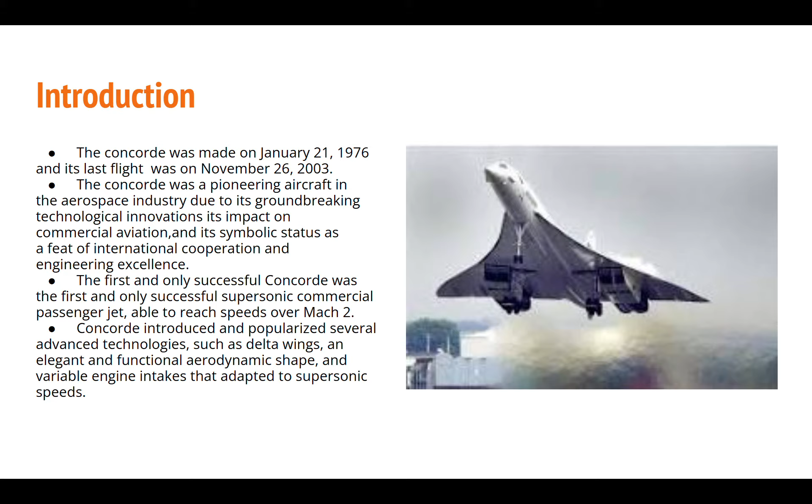The Concorde introduced and popularized several advanced technologies, such as delta wings—an elegant and functional aerodynamic shape—and variable engine intakes that adapt to supersonic speeds. It was the first supersonic commercial airplane, built by aircraft manufacturers in Great Britain and France, and it flew thousands of passengers across the Atlantic at twice the speed of sound for over 25 years.

In 1989, Air France signed a letter of agreement to donate a Concorde to the National Air and Space Museum upon the aircraft's retirement. In 2003, Air France honored this agreement, donating the Concorde F-BVFA to the museum upon completing its last flight. The aircraft had flown a total of 17,824 hours. 20 aircraft were produced, but only 14 went into service.

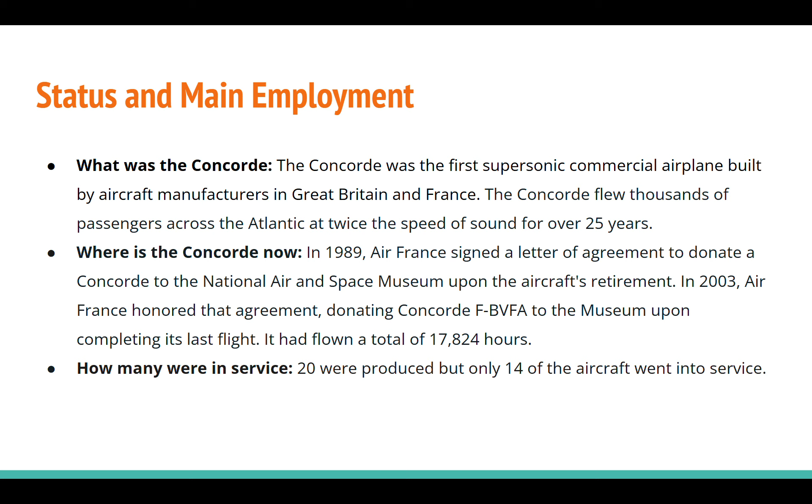The development of the Concorde started in the late 1950s with the Supersonic Transport Aircraft Committee. The British Aircraft Company tested its first flight with the BAC 221 for supersonic testing, and the first prototype flight of the Concorde took place with 2 tracker jets to calibrate airspeed and indication on March 2nd, 1968.

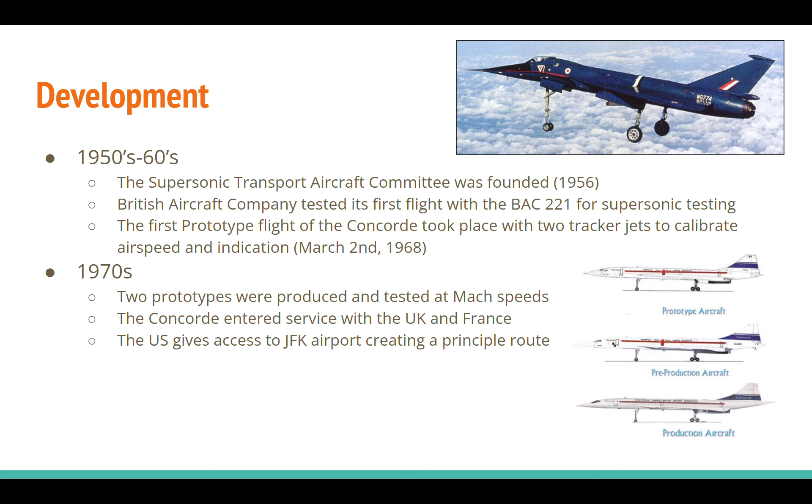In the 1970s, two Concorde prototypes were produced and tested at speeds of Mach 2, and eventually the Concorde entered service with only the UK and France having aircraft. Later on, the US gave access to JFK Airport, creating a principal route for the next 25 years.

In the 1990s to 2000s, the fastest flight recorded between New York and London was 2 hours and 53 minutes, one of the fastest times taken.

On July 25th, 2000, an Air France Concorde crashed after takeoff from a piece of debris, popping a rear tire, causing parts of the tire to pop the fuel tank and causing the engine to catch fire.

After the crash, both Air France and British Airways withdrew service of the Concorde to begin improvements of the aircraft. In late September, improvements were made with the wheels and fuel tanks. British Airways and Air France reapplied for airworthiness and continued the flights.

In late April of 2003, British Airways and Air France announced that at the end of the year the Concorde program would be retired. Now, the cost of the Concorde.

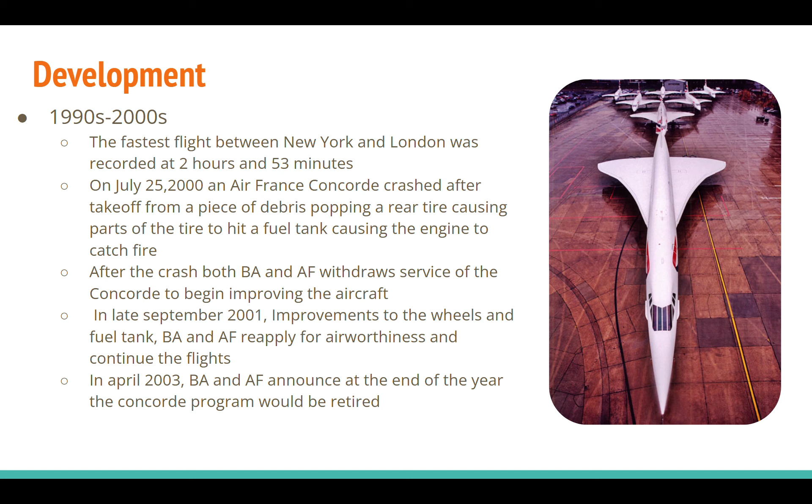One Concorde cost roughly $46 million, estimated at $350 million in today's price adjusted for inflation. The development cost roughly $1.14 billion to $2 billion, split between France and the UK. Of the 16 planes built, costing a total of $819 million, only $348 million was recovered through sales and returns.

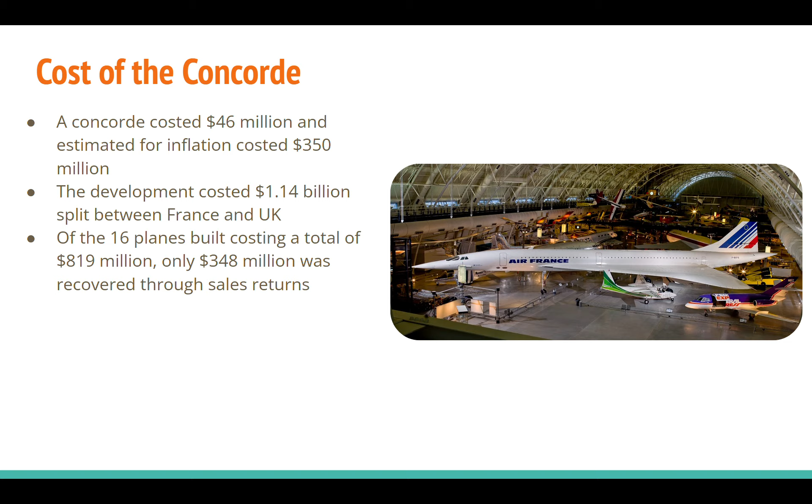Moving on to the dimensions and properties of the aircraft: the empty weight of the Concorde was 92,080 kilograms, while the max payload was 13,380 kilograms. The maximum takeoff weight with fuel and payload was 185,000 kilograms, and the max landing weight was 111,130 kilograms. Overall, the fuel weight was 95,680 kilograms.

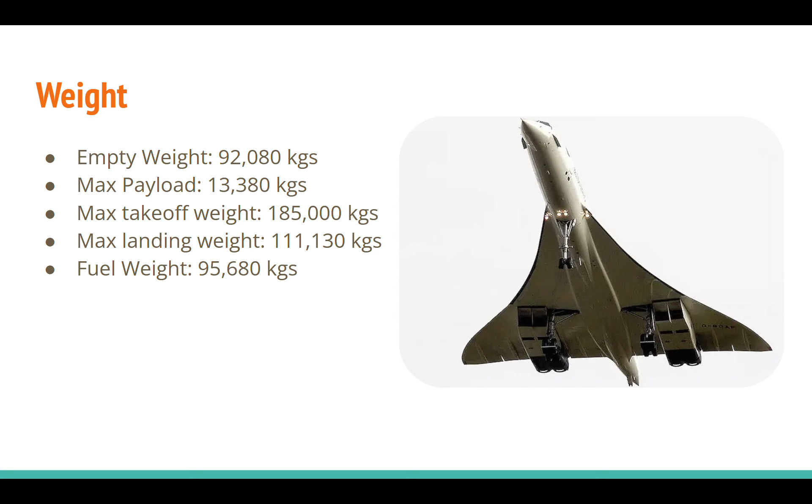Moving on to more dimensions, the overall length of the Concorde was 61.66 meters, and the height from the bottom of the wheel to the top of the fin was 12.2 meters. The fuselage had a width of only 2.9 meters, and the whole aircraft had a wingspan of 25.6 meters.

The length of the root chord was 27.66 meters, leading the Concorde to have a small aspect ratio of 1.85 and a total wing area of 358.25 square meters.

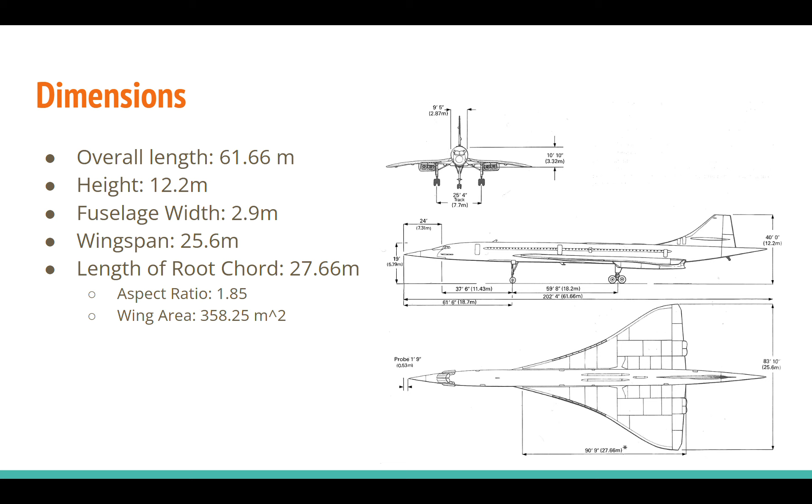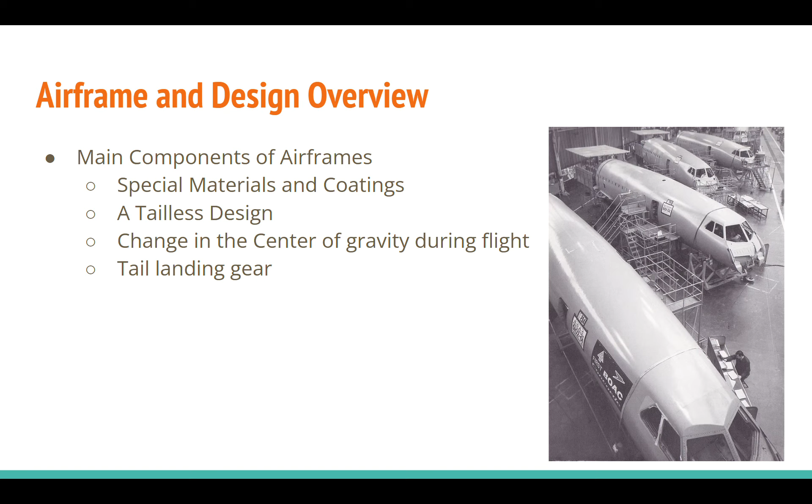From the airframe and design overview, the main components included special materials and coatings, a tailless design, changes in the center of gravity mid-flight, and tail landing gear.

For the special materials and coatings, it used a Hiduminium alloy—a high-strength alloy developed by Rolls-Royce—with main impurities including magnesium and copper. The temperature limit was 127 degrees Celsius, only allowing it to reach Mach 2.02 as a max speed.

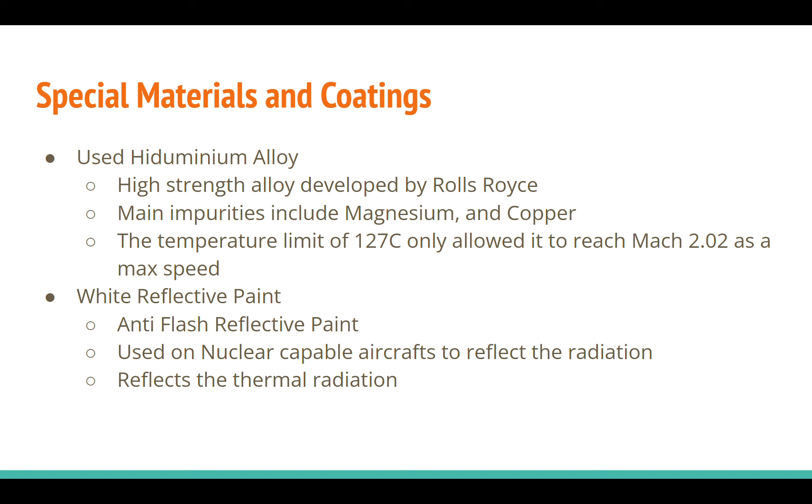There was also a white reflective paint with anti-flash properties, used on nuclear-capable aircraft to reflect radiation. It also reflects thermal radiation as well.

The Concorde had a tailless design, so there was no horizontal stabilizer, which reduced parasitic drag. Instead, they used elevons for much more stable flight.

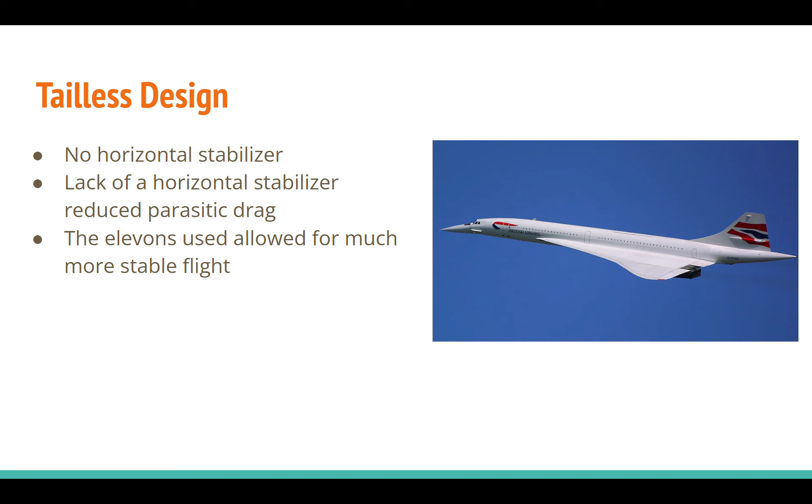Because of the critical Mach number being exceeded, the center of pressure would move backwards when the aircraft exceeded that speed. They had to combat this, because it would be very inefficient to try to adjust and trim the aircraft at those speeds. So, to combat this, they used fuel distribution tanks to move the center of pressure backwards, and as it moved backwards, the center of gravity also moved backwards.

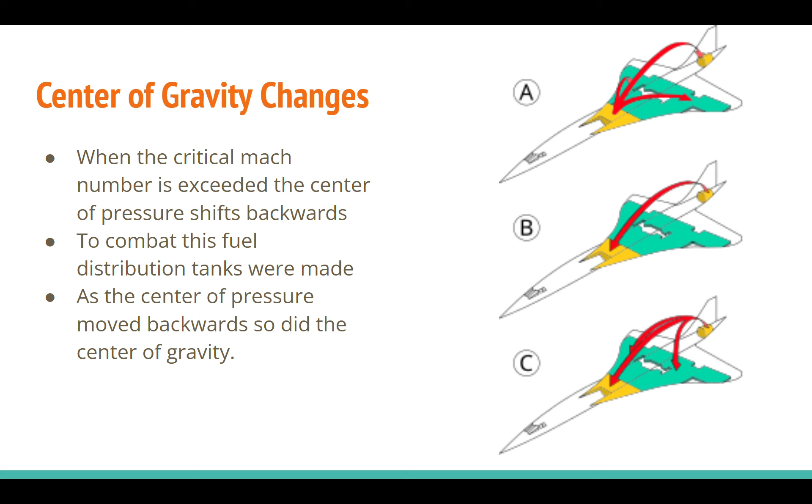In addition, they used tail wheels. The tail wheels were used to protect the Concorde during landing and takeoff, and also helped optimize the angle of attack for takeoff. In the event that the wheels touched on landing, they would compress before the engines touched the ground.

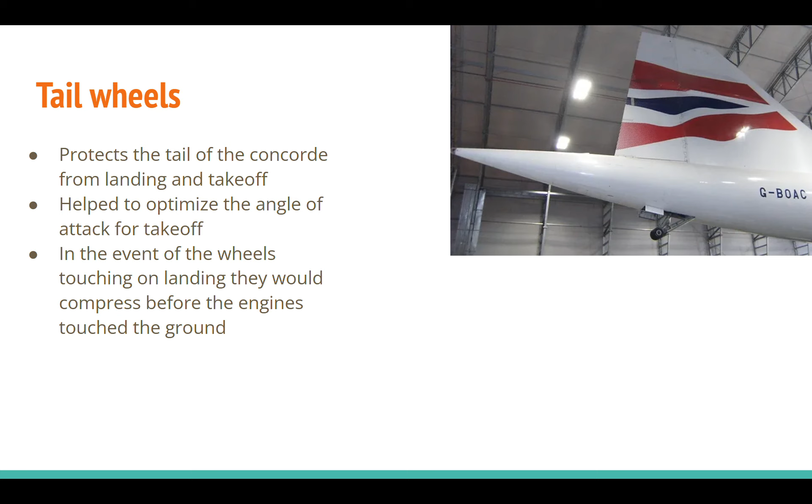The power plant had a variable intake system which allowed for compression of air at supersonic speeds. It used two ramps, one converging and one diverging, because it would be easier and make the engine much more efficient at those speeds. It was able to increase fuel efficiency at cruising altitude to Mach 2.2, beyond the capabilities of what the airframe could handle. This was also easier to accomplish through nonlinear controls, using a spill door and intake flaps to help.

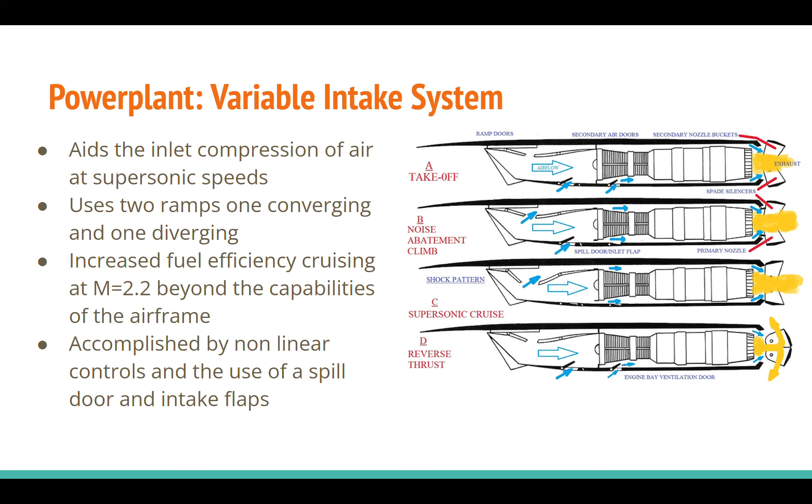For the power plant, it used a Rolls-Royce Snecma Olympus 593. The Concorde used four of these jet engines, a two-shaft turbojet with reheat, with a 7-stage high-pressure and low-pressure compressor. It had 140 kilonewtons of thrust, and 169.3 kilonewtons with the afterburner. Parts that received excessive heat were constructed out of titanium, and because of this, the life expectancy of the parts was considered to be 25,000 hours, with the exception of the compressor and turbine blades, which had a life of 10,000 hours.

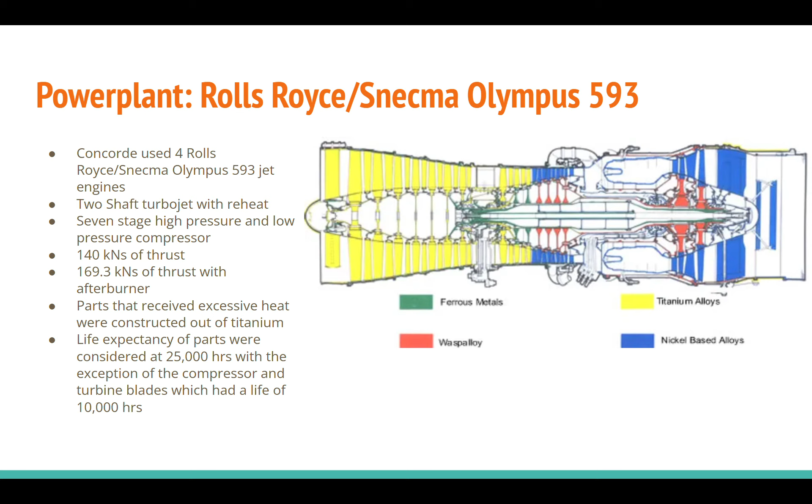The variable exhaust nozzle was designed to provide the most efficient thrust. At speeds below Mach 0.55, the buckets would be set to 21 degrees to form a jet pump airflow. At higher speeds, a secondary door would open, and from there the buckets would be progressively opened to 0 degrees at Mach 1 to form a diverging duct, which increased efficiency at supersonic speeds.

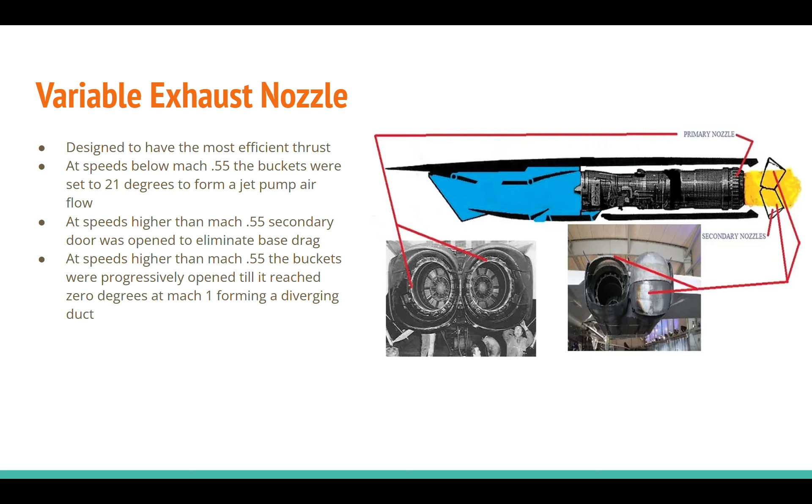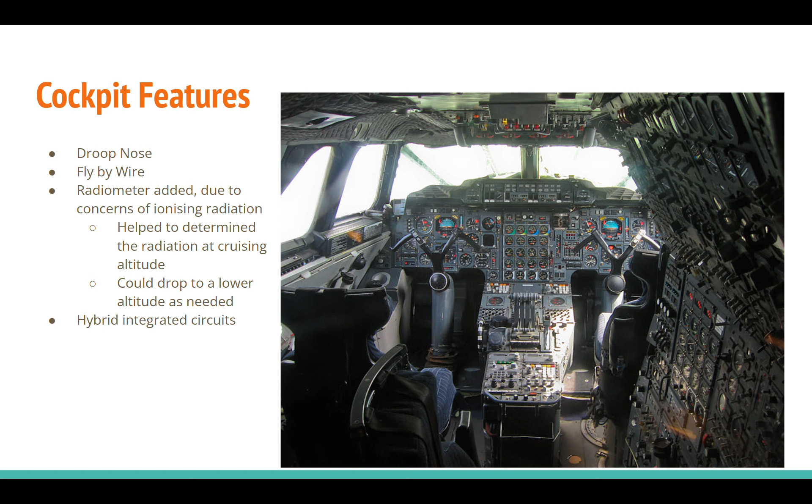Cockpit features include the droop nose, fly-by-wire, and a radiometer, which was added because of concerns about ionizing radiation, helping to determine radiation levels at cruising altitude and allowing the aircraft to drop lower as needed. In addition, some of the features in the cockpit used hybrid integrated circuits.

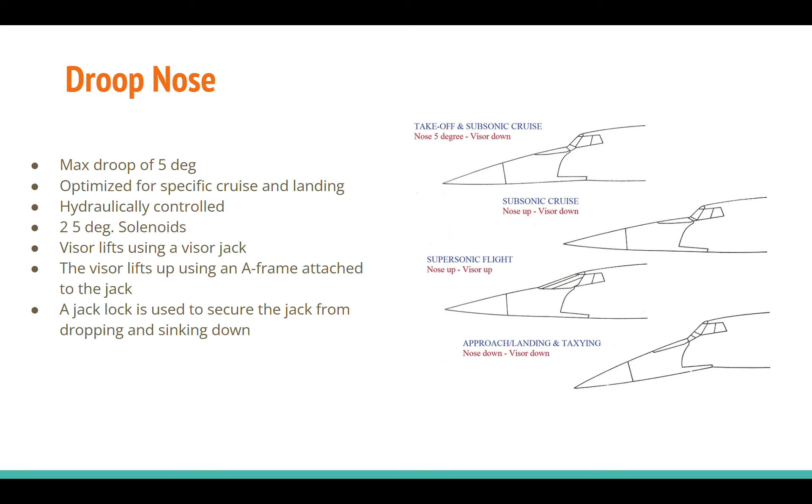The visor was lifted using a visor jack. When it lifted up, it would use an A-frame attached to the jack, and a jack lock was used to secure the jack from dropping and sinking down during flight.

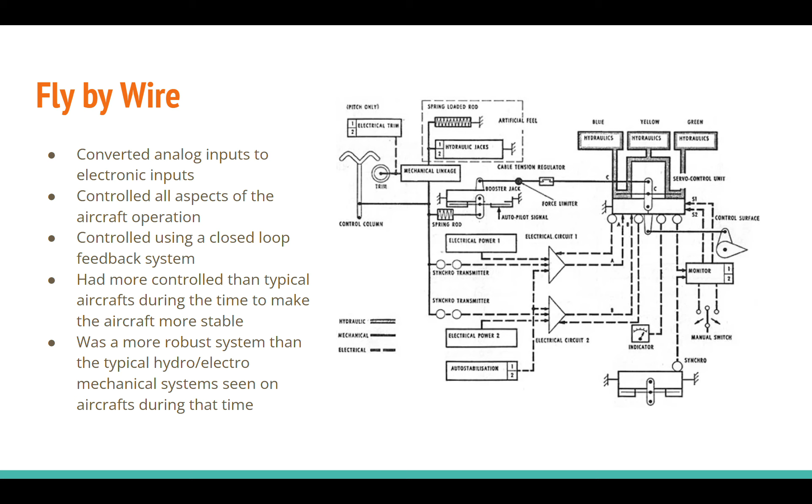Fly-by-wire converted analog inputs into electronic inputs and controlled all aspects of aircraft operation. It was controlled using a closed feedback system, which made the aircraft much more stable than typical aircraft at the time, since those did not have a system that could take inputs and actually implement them without the pilot continuously inputting those signals. It was also much more robust than the typical electromechanical systems seen on aircraft during that era.

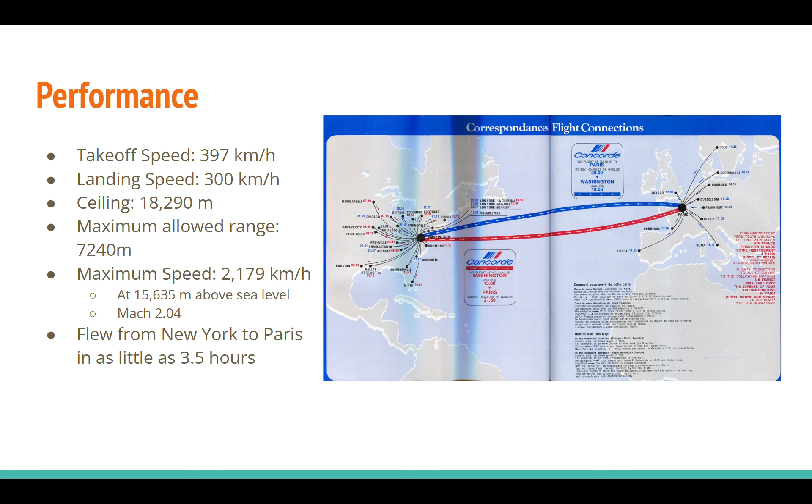Now moving on to performance: Concorde had a takeoff speed of 397 kilometers per hour and a landing speed of 300 kilometers per hour. It had an overall ceiling of 18,290 meters, with a maximum allowable range of 7,240 meters. Concorde had a maximum speed of 2,179 kilometers per hour at 15,635 meters, letting it fly at Mach 2.04. It flew from New York to Paris in as little as 3.5 hours.

The retirement of the Concorde: it retired in 2003 after a number of factors, including high operating cost, noise, the crash in 2000, and limited flight availability.

The Concorde was expensive to operate. It required a lot of jet fuel, resulting in high fares. It was a very noisy aircraft and had major complaints. In 2000, an Air France Concorde crashed shortly after takeoff, killing 109 people on board and 4 people on the ground. It was a fatal incident.

Concorde's high operating costs and noise limited flight availability. Thank you.